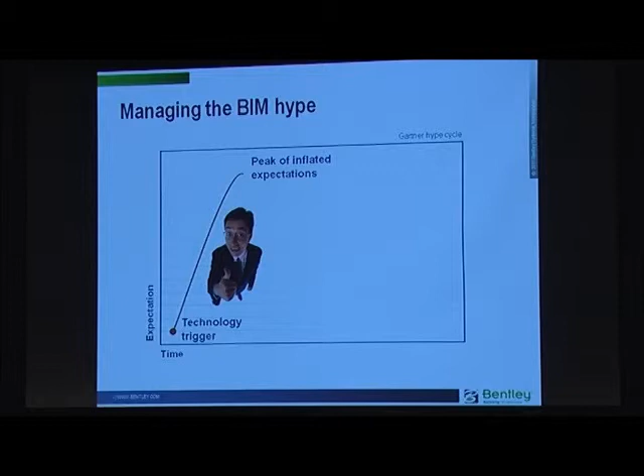But they quickly realize it doesn't actually do them any good. It doesn't live up to the hype. They install this thing on a big shiny machine in the corner, and it doesn't create their drawings automatically. They still get clashes on site. They can't set things out on site properly. So they've invested this time and effort, and in fact some designers and contractors I talk to say they're spending many more times the amount of money to produce drawings or construction documentation using 3D tools, using BIM, than they were using 2D. So it's a big issue.

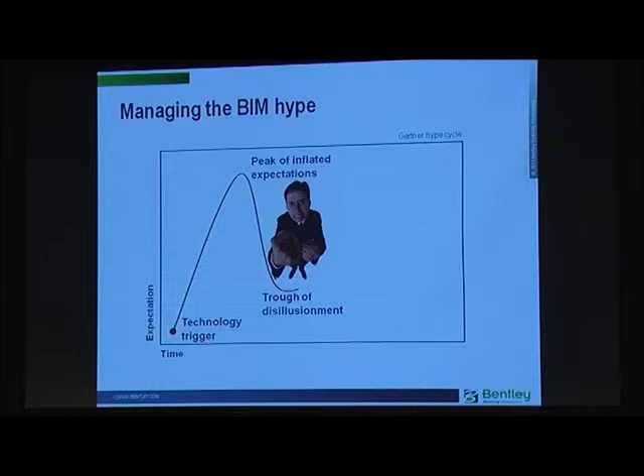Now, as we all know, BIM does give us benefits. It does do some great things, but you have to work at it. So gradually people understand what it can do, and you reach a point when it's actually giving you some benefit. Now it could be that you're just doing 3D clash detection, it could be setting out on site, it could be cost estimating - any number of things that work for you as a business. But it's important to understand it's what it does for you individually, not just this great big panacea of BIM. So the trick is to try and go from somewhere halfway up on the left-hand side before you get to the peak, and head off to the plateau.

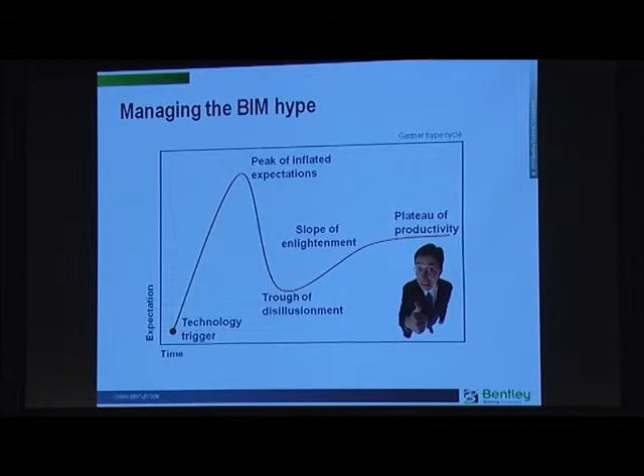So what do we usually do as an industry? Well, we use 2D. We've used 2D paper for years. Increasingly we're using electronic paper, so we'll issue PDFs, but essentially we're just doing 2D.

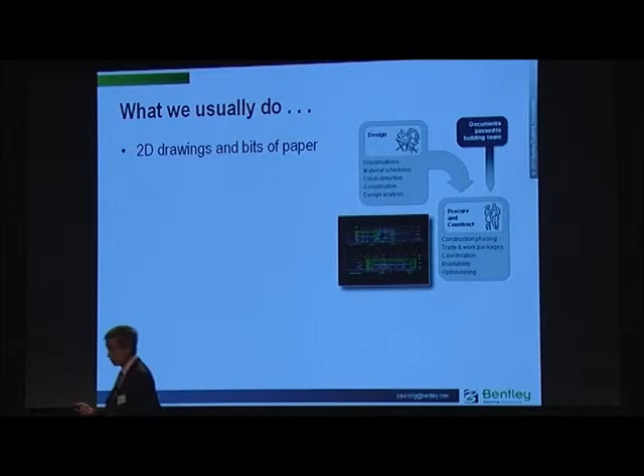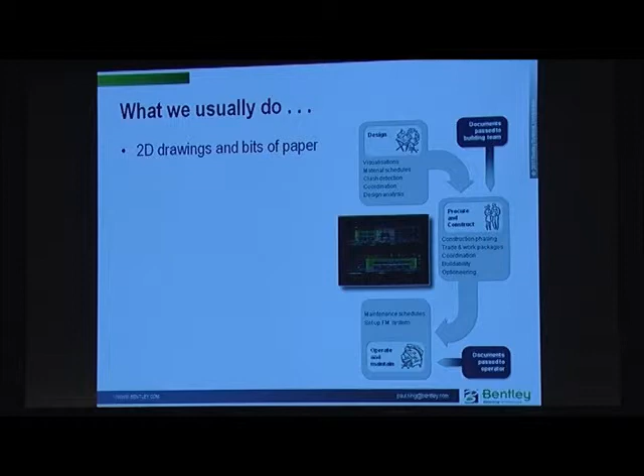So we start off with the designer. The designer hands a whole pack of paper across to the contractor, and the contractor then sits on site, makes sense of this box of paper, or tries to build the building. And at the end of construction, passes across a room full of paper, boxes, plan chests, brochures, everything else - all goes off to the poor FM guy, who on day one of the contract opens up boxes and finds he's got the contractor's holiday brochures and memos and all sorts of things stuck in a box that's marked handover information. And we know it doesn't work.

Without going into detail, we all know the issues about passing information around the supply chain, where it doesn't work. And this, again, is another waste figure - pick a number, really. This was in The Economist magazine a couple of years ago, where they looked at global projects, and they said typically 30% of the project cost is waste. Now, some of that is rework, but a lot of it is in things like variations. It's in the fact that things go missing. There are errors in drawings, in site works, all sorts of things, but this all gets hidden in contingencies and extras and revised programs. But there's a lot of money in there that shouldn't be.

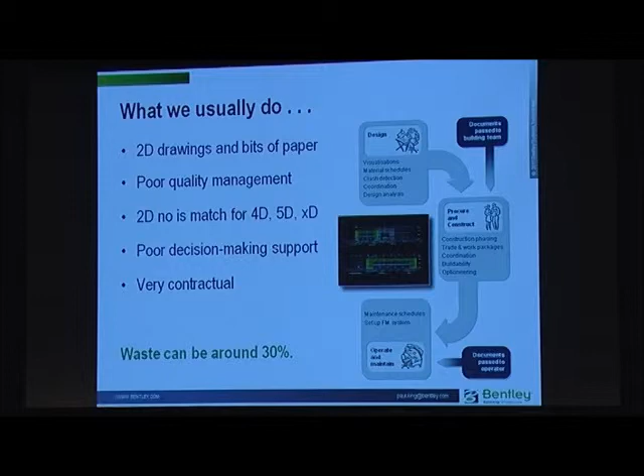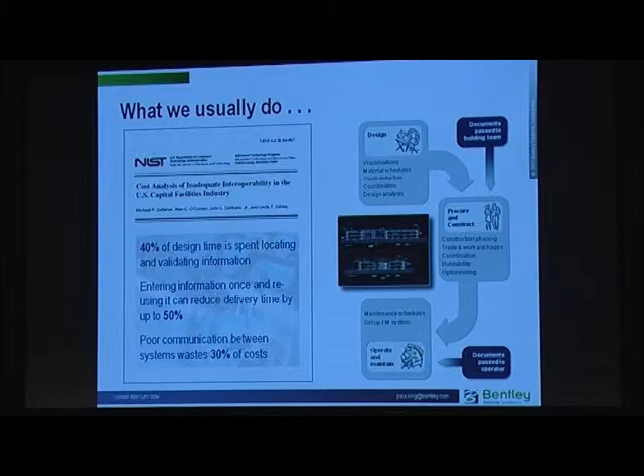There was a report from an organization called NIST in the United States a couple of years ago. It's quite a thick document - worth a read - but it's got some highlight figures in there. It said that 40% of design time is just spent locating and validating information. So forget whether it's 2D or 3D - I spent my time on site, you've got two drawings, exactly the same number, the same revision, but they show slightly different things. In one the manhole's here, and in one someone's moved it over there. And you spend time trying to work out which of those two is correct. Or maybe neither's correct - maybe there's a third version floating around somewhere.

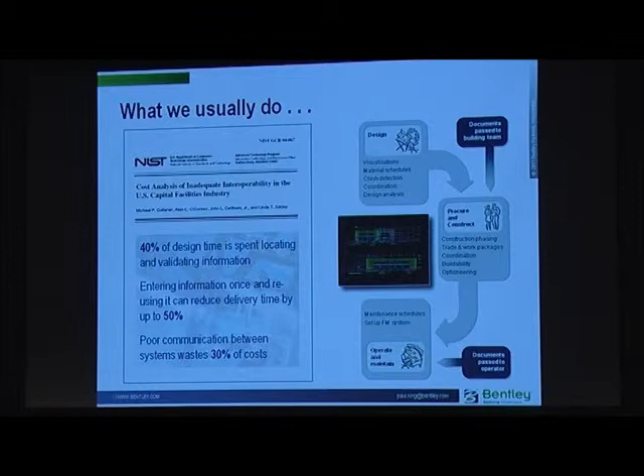The second key point was about entering information once and reusing it. This is starting to go onto the BIM theme, where people create something and it's then reused for lots of different purposes. So we have this pump that sits in the BIM MEP system in your model. If that can be used by the cost planners, by the programmers, by the purchasers, it all starts to save money because you're reusing that information. And poor communication between systems, again, wastes a lot of money. So that's starting to get into things like BIM interoperability - can I take a Revit file and put it into a Bentley application? Can I take a Bentley application and put it into an ArchiCAD file, and so on?

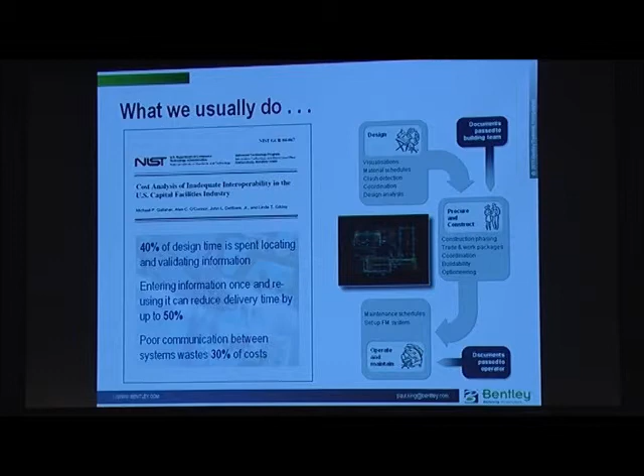And I put this in just to show, really, to sort of sum up where we are.

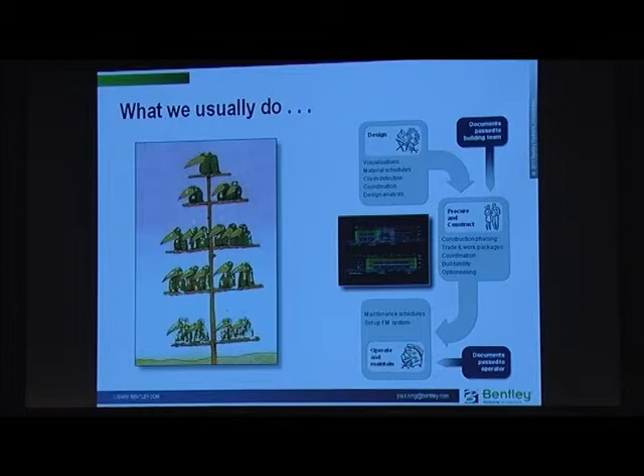It's interesting, when I show this to owners, I always used to think naively the owners would see themselves at the top. But the owners always say they sit about the middle somewhere, and the main contractor sits at the top. You talk to the main contractor, they say no, they're on the bottom perch somewhere because they get screwed by the architect. There's all sorts of things we can all relate to, where we sit on that chain.

So BIM's a better way of doing it. Again, thinking about our own version of BIM, what relates to us. I've put the definition in. This is the simplest definition of BIM that I've found. I like it just because it is simple. There's lots of academic work about BIM, but it's really about the process, as has been said before, of generating and managing asset data through the life cycle.

Now, as an industry, we get very excited by the kind of what some people call Hollywood BIM. It's the moving images, it's that we sit down with clients and we show them, we walk through. It's all the clever, sexy stuff that looks good. It never really goes beyond that much. We're starting to go into construction, but we're not really integrated into construction yet.

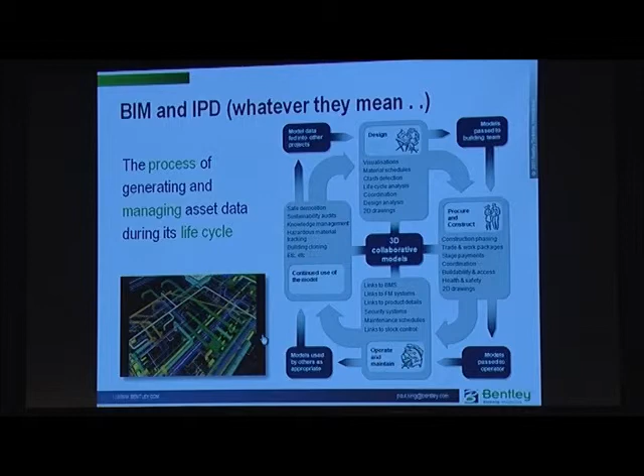So this diagram up here really is trying to encapsulate that whole BIM process and emphasizing it really is about delivering asset information for users. So we've got all these pipes and ducts and fans going into a model, but importantly, it's about the data that sits behind them. So what can the client use long-term to get benefit? And what can we as contractors and designers get from that along the way?

Paul was just talking about these different file formats as well. As a contractor, you're faced with receiving all these different bits of information. A typical design team will be using Revit, ArchiCAD, Bentley Mechanical, a whole range of different tools, SketchUp. Next year there could be Google BIM or Google Mechanical BIM, all these things are constantly coming onto the market. And it's important that project teams can use the best tool for the job.

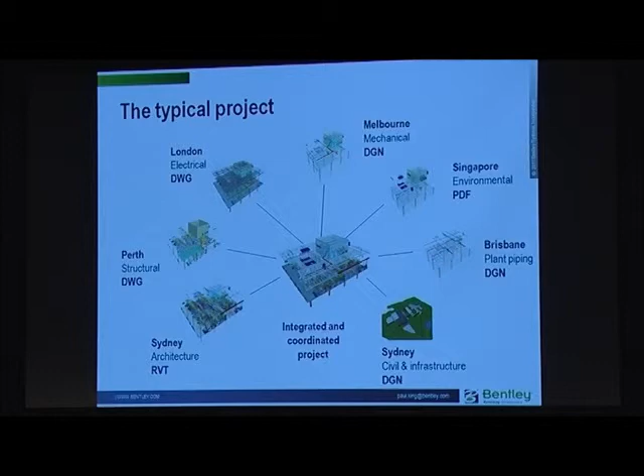It's very rare you can find one client that will say, right, we only use one package and only one version of that package. It's very difficult to do that.

The Bentley approach is what we call federated models. And it's a very efficient way of working when you've got larger teams. So each discipline creates their own stuff, if you like, their models, their drawings, their spreadsheets. And in this environment, the important thing is that only the originator can change their content.

So if the architect here is creating his walls, when he puts his models into the shared environment, you can't have the structural guy moving an architectural wall. Okay, so ownership has to retain with the originator.

And it means you can bring those together, as Paul was just saying, for things like clash detection. We never clash a whole building in one go. In my mechanical services background, we'd do things by floor or by zone, or you'd clash a plant room or a riser. So what you want to do is be able to bring that different content together at different times, in different formats, for different purposes, but do it in a way that's managed.

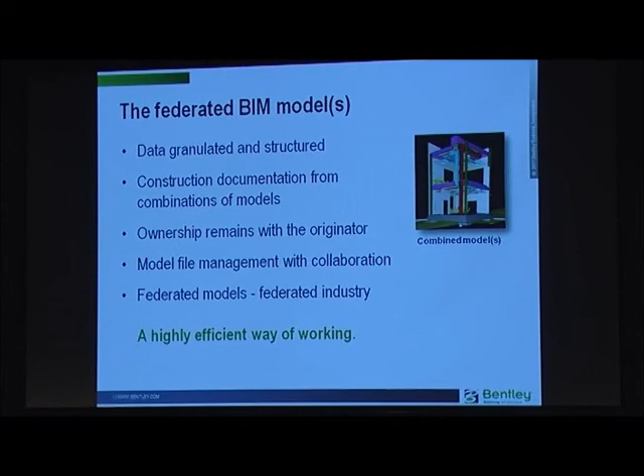So going back to ensuring, if I'm bringing those different parts of the building together, I know that I've got the latest version. I've got the version that's correct for doing coordination. So it's very efficient. Again, just a few models.

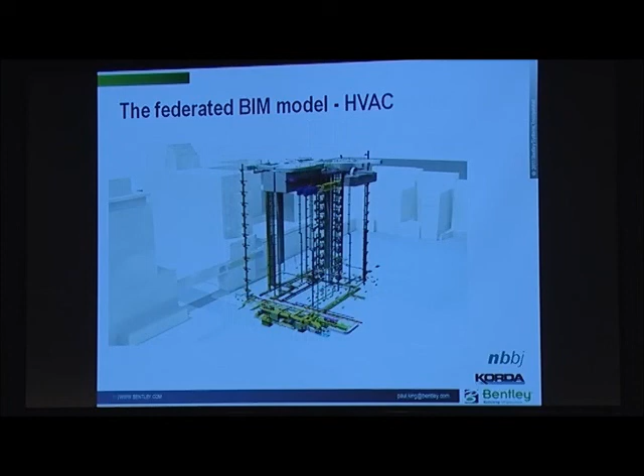We all do our own thing. We've got the structures, the mechanical, electrical, piping, hydraulics, all doing our different version of a design submission for that.